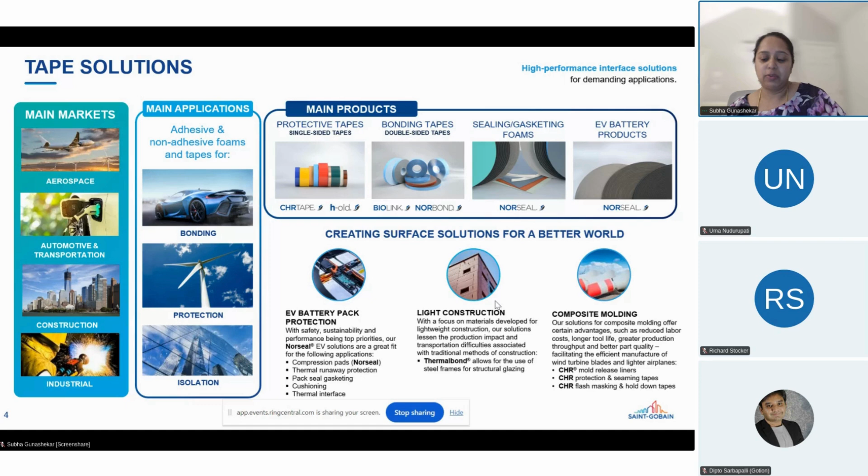With that background, I want to give a little introduction on why compression is important in cells, then talk about thermal propagation, and then introduce our strategy about providing multifunctional materials which combine both mechanical and thermal properties in cell-to-cell and pack design applications.

To begin with, maybe it's preaching to the choir to some extent, but I'd like to start with this background. There's a very nice study which talks about stress evolution and how it is related to the capacity of batteries. If you look at the cells, once they're made and you start using them, there are several types of swelling you will come across. The first is reversible or cyclic breathing, which happens during normal charge and discharge cycles, so the thickness or gap between cells varies, but it's not permanent.

It could be reversible. Then there's another part of swelling where over time, from the beginning to the end of your life, your cells gain some thickness or increase the gap between them. So there are two phenomena normally going on once you start using cells in a pack, and using the right material to manage these two is very critical.

Why? Because many battery cells require some amount of pressure to function, especially new technologies like silicon-based anode, which really require some pressure. Same with solid state batteries. With NMC and LFP, we are just dealing with normal charge and discharge, reversible cyclic breathing.

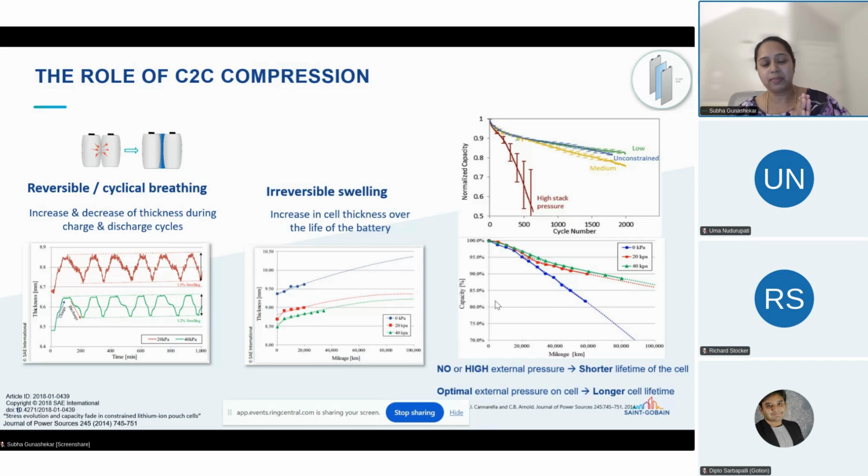So irrespective of the cell type, the crux here is that there is some pressure requirement. If you apply too much pressure over a certain period of cycles, you see the capacity decreasing - this is the top curve. Whereas if you apply the right amount of pressure over prolonged cycles of charge and discharge, the capacity stabilizes or doesn't drop as much. In layman's terms, translating that capacity to mileage or range, it's very important to have the right amount of pressure on your cells.

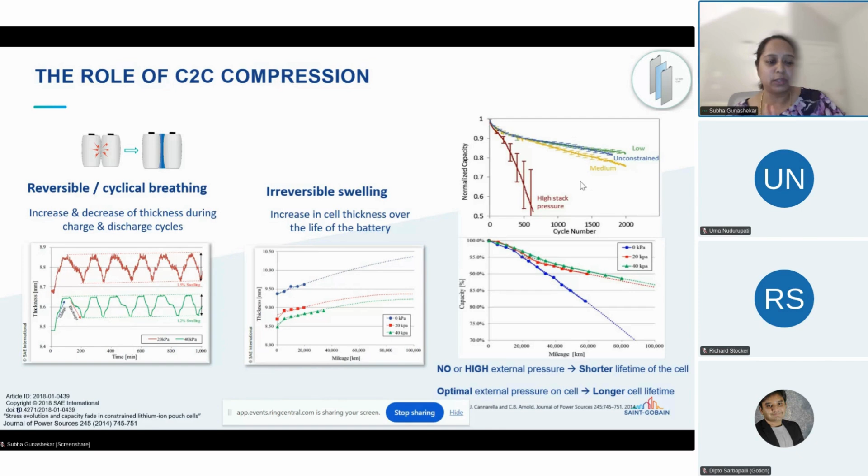So with this background, we want to see what factors affect cell performance - what else can change or impact the range of your vehicle or the capacity of your cells.

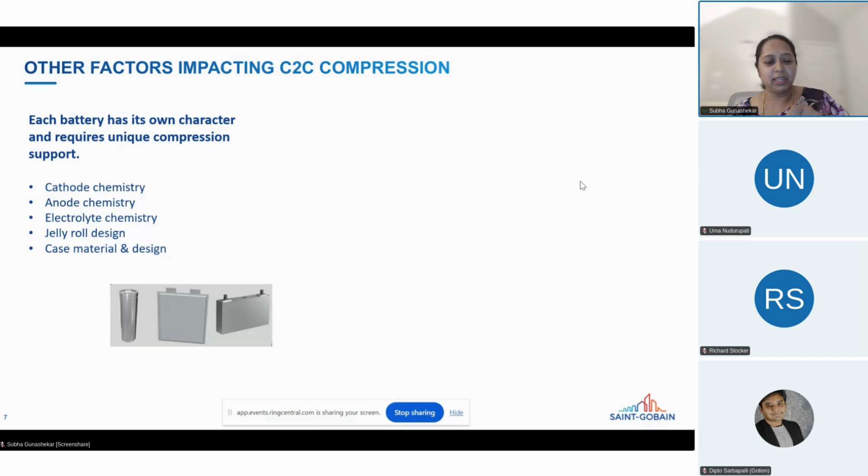So the first one was just the cyclic, reversible or irreversible breathing. The next one is the type of anode or cathode you have, or the electrolyte chemistry, and even the form factor, whether it's a cylindrical cell, pouch, or a prismatic cell. So, depending on each of these factors, your cells will have different pressure requirements.

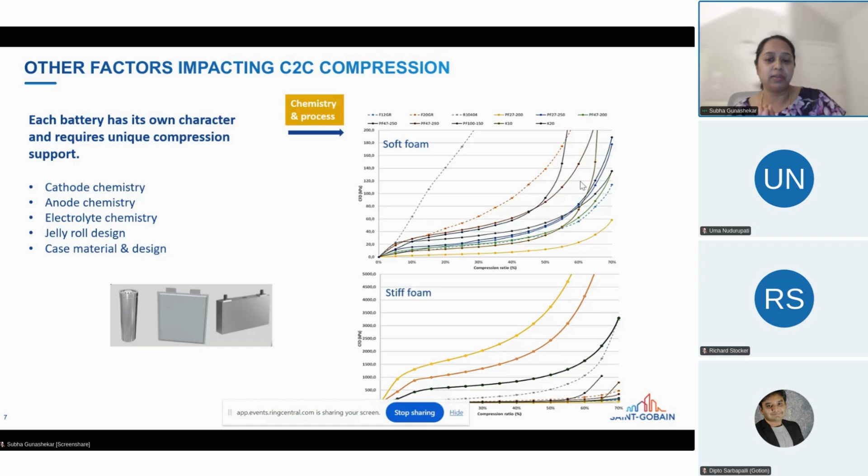Sometimes you need a soft material to help with this breathing process to make sure your cell capacity does not fall. Sometimes you need a very rigid material. So all of this can be managed through polymer foams. As Saint-Gobain, that's one of the key products we are offering in this area. So I'm going to talk more about that.

So from this overview, we said there are two things which are important: making sure that the dimensional changes are accommodated irrespective of the type of cell you have, and then ensuring there is optimal pressure on the cells. So there is no one size fits all solution, unfortunately. This we have learned through design and development with several of our customers. Whether it's a type of cell or a type of chemistry, the pressure requirement is different.

So in the EV space, particularly for the batteries, we haven't been able to offer one standard product off the shelf saying that, yes, this is what would work for this. So though our goal is to get to a stage where we can offer some standard solutions, it involves some kind of customization and development usually. So the earlier on we are engaged in the design phase, it's much more easier to make sure the right product is provided to our customers.

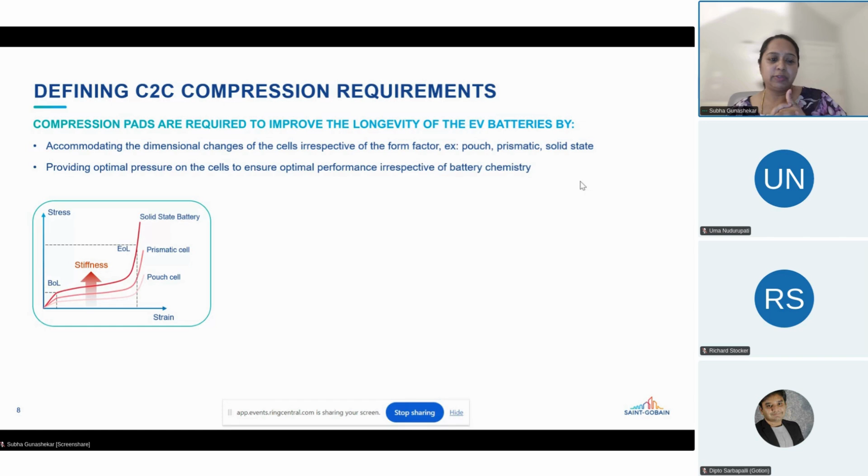So looking at this example here, usually the process starts with defining the kind of requirement. The type of cell or the chemistry kind of dictates those requirements. And what does that translate to us? As a materials provider, we're talking about polymer foams here.

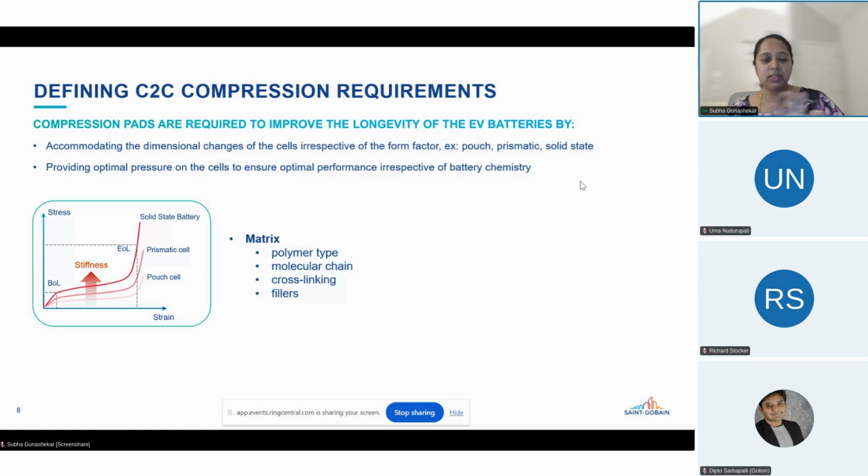So the requirement from our customers translates into the type of polymer we would use, how much cross-linking we need to have, what kind of molecular weight you need to have, do we need to have fillers, or whether we need to provide a softer foam or a rigid foam. So this forms the basic matrix. And then the type of matrix materials used define the microstructure, which kind of translates to the properties we will get eventually. So it's kind of a loop.

It starts off with the application requirements or the technical requirements of the type of cell, and then we design the polymer matrix or the microstructure to provide a certain specific microstructure, which can provide you the properties you're looking for.

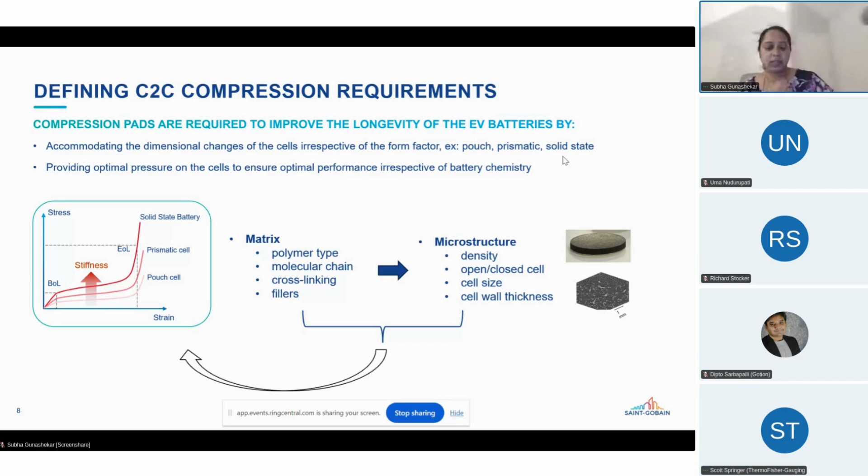This works mostly for the compression requirements, but having the ability to manipulate or formulate these polymers from basic raw materials, we're able to modify it further to add multifunctionality. So that's where the second layer of protection kind of comes in, related to thermal management, where we are not just limiting the performance of our materials to provide a certain amount of pressure, but also some amount of thermal propagation or thermal management.

So specifically over the past couple of years, we have designed a polyurethane-based series of foams with various flame ratings and various densities and thicknesses to address this challenge in the e-mobility, ESS, or EV charging market. So one important factor here is that these foams are engineered to provide mechanical cushioning, and it's very important to have that constant deflection force.

So there are lots of polymers. There are much cheaper polymers, and then there are other polymer foams, for example, silicone foams, which are much more expensive. The question is, why should I choose polyurethane foams? So the key factor is to have a constant deflection force.

So once you have a cell in a pack, from the time it starts charging to the end of its life, let's say it's about 10,000 cycles, whatever material you use as a compression pad between the cells or a group of cells, it should not lose its structural integrity, where it would kind of lower the pressure requirement on the cell or help damage the cell in some cases.

So polyurethane foams are very good in maintaining a constant deflection force. They have very good compression set, meaning over a prolonged period of time, they don't lose their structural integrity. In addition, there's also good dielectric strength, which is very important for safe electrical operation in packs.

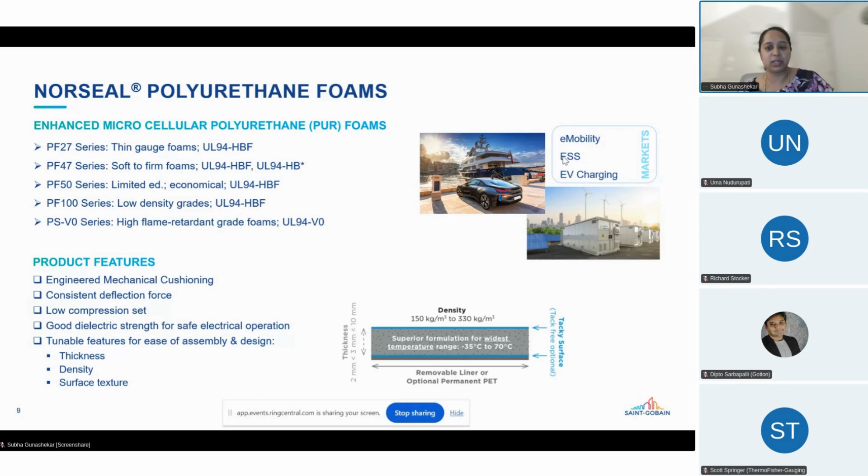Talking about compression pad applications, what is the property we measure and how does that translate to your pressure and force requirements? The common lingo we use to talk about compression pads is compression force deflection. This is not the first time you compress your foam.

If you look at the curve here, you take a piece of foam and compress it. The initial compression is your force to compress, and then if you hold that at the same strain rate for about a minute, there is some stabilization. Your force value falls and then becomes stable. So at the end of a minute, we measure the stress again, and that's called the compressive force deflection.

Here you see a stress strain curve of several of the polyurethane foams I just spoke about. Depending on the density, you can see the compression force response here. A more rigid foam will have a higher force value compared to a much softer foam.

Overall, in battery cell and pack applications, what we want is a flatter curve over a long strain period. For example, between 10 to 60%, or 10 to 70%, you don't want your force values to go up too much. So we've been at work on this for quite some time now.

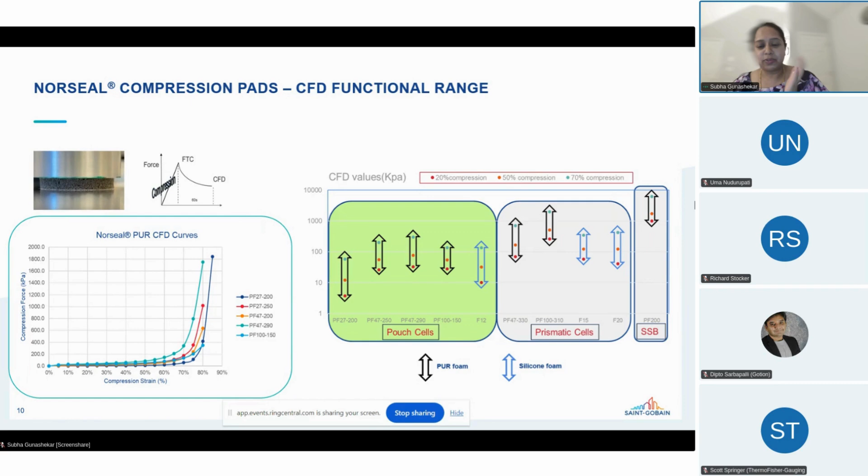But in terms of cost, the advantage is to use a polyurethane based solution because it's much cheaper and provides you a wide stress strain curve.

Talking about the polyurethane foams, I want to share a case study here to relate how this translates to performance. We have this product PF47-250, which is used in some cell-to-cell applications by a few of our customers.

The customer came to us asking for some validation test to confirm, okay, let's take 3,000 cycles, and I want to make sure that this product does not lose its performance, mainly the pressure or the thickness, or the structural integrity, irrespective of the temperature range.

So we did this test at room temperature, 60 degrees, and at minus 20 degrees. We did cyclic fatigue tests and measured the thickness before and after, and also measured the stress strain values.

You see this curve here is just at 60 degrees Celsius between cycle 1 and cycle 3000. There was a little bit of a drop between the first 100 cycles because it's a polymer material, so there is some lag there, but it's very resilient. After the 100 cycles, it did not grow further. The hysteresis is much shorter.

That's what this graph is showing. This is a summary of all three different temperatures. At different temperatures and after 3000 cycles, you can see there's been not much material loss. The foam is still intact, no visual damage. The thickness loss was less than 3%. The stress drop stabilized after the first 100 cycles, so there was no significant pressure or stress loss irrespective of the number of cycles.

This is very important when you're talking about cell-to-cell applications. This was custom made for a particular type of battery chemistry and form factor. The same can be repeated depending on what customers are asking for.

Any questions on this so far?

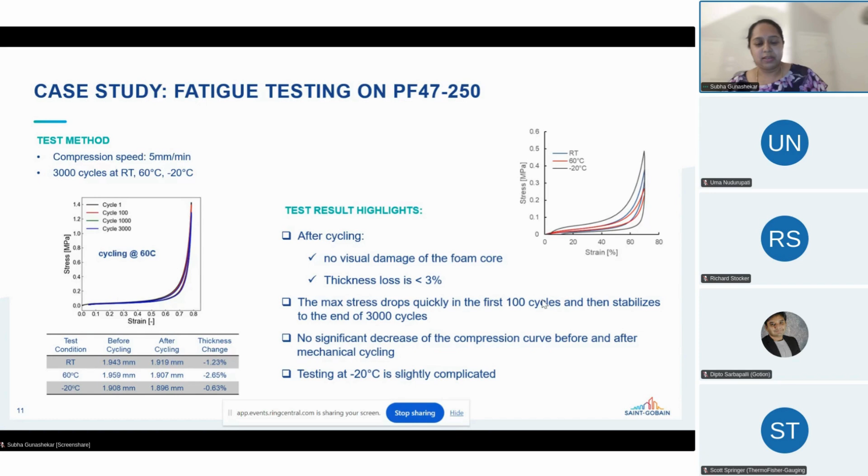I will transition to the thermal aspect now. Similar to compression, thermal propagation is kind of a tricky factor as well, depending on your cell chemistry and the form factor. It's something which is very important to manage. If not, it could be a very costly issue to resolve. So having the right kind of thermal barrier between cells or a group of cells can help mitigate thermal runaway propagation in case of a thermal runaway event.

Here, through modeling, what we're trying to show is without any thermal insulation, once the cell goes into thermal runaway, it spreads to the rest of the cells very, very quickly. In this case, it was about 4 minutes.

Adding one layer of material can help slow that down. But if the right choice of material is not used, it could continue the propagation, but at least your time has increased, from 4 minutes to 13 minutes. Whereas if you have the right kind of material, your thermal propagation can be delayed or stopped. Stopped is kind of a stretch goal depending on the type of cells. It's really challenging.

Cost also plays a role in getting the right kind of thermal prevention material. But there are cases where if you have the right kind of thermal barrier, you can stop or delay the propagation significantly.

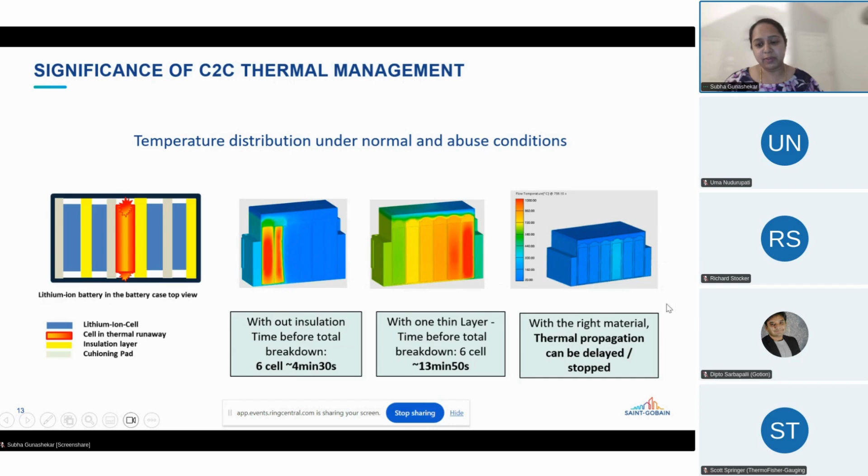This was an example where we were trying to test various battery chemistries and different types of materials. With NMC 622, one of the materials we used failed, whereas when we used an NMC 532, the same material worked pretty good and stopped thermal propagation.

Another thing we found out, but I don't have images to share, is the type of vent and vent design or vent size can influence your thermal propagation significantly. In NMC 532, the vent was much bigger, and it was designed so that most of the projectiles during an event would be going in a certain way, so it had a certain path.

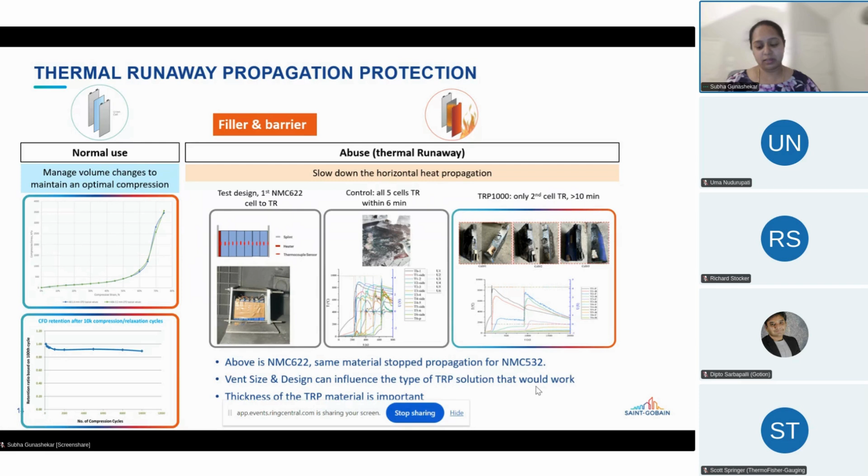Here's a similar map of the thermal runaway materials. There are some which are polymer-based, but silicone-based are the more popular materials here because they have a V0 rating, which provides some initial protection because of the higher flame rating and also higher temperature range. TRP 1000, TRP 5000 series are some of the products we use here.

Again, we're talking about pouch and prismatic cells. There is a mechanical component and there is a thermal component. How do we marry these two properties to provide the optimum solution has been the basic strategy for us in our development activities.

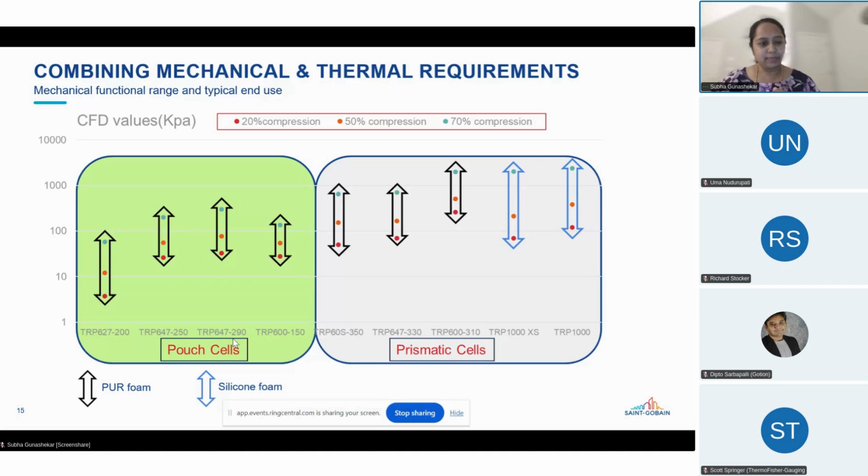I don't know how we're doing on time, but I want to go over some product highlights. This is the most basic product we offer today, which combines the mechanical and thermal properties to some extent to delay the thermal propagation and also provide good mechanical cushioning if used in cell-to-cell applications.

It's called TRP 1000. We have a mica layer and a foam here, a silicone foam. This silicone foam can be replaced by a polyurethane foam if the cells used are LFP cells, where the temperature range itself wouldn't exceed more than 600 degrees. Whereas if it's NMC, your temperature ranges are more than 600, close to 800 or 1000. So we would go with silicone in those cases.

So this is one of the key products we've introduced to manage cell-to-cell thermal and mechanical propagation.

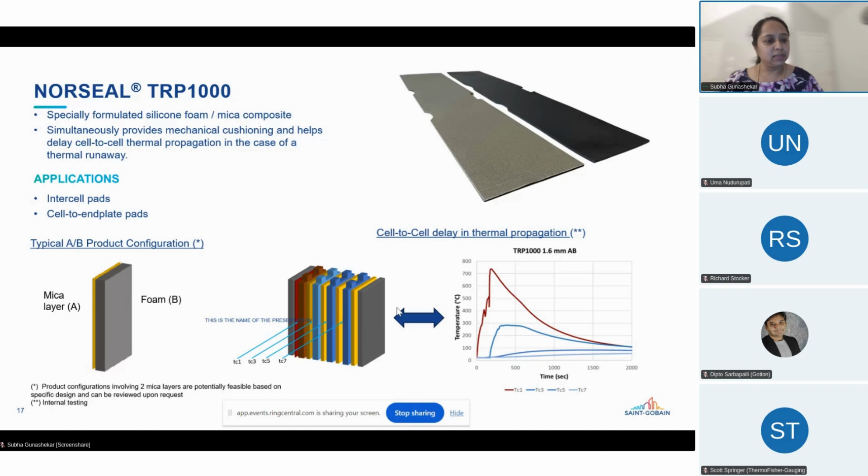The second one is more like a back cover. It's a solid silicone-based material, since many of our customers don't make the cells, so they don't have a cell-to-cell requirement, but they have modules which are put together in a frame. All they're looking at is a pack level or module level cover.

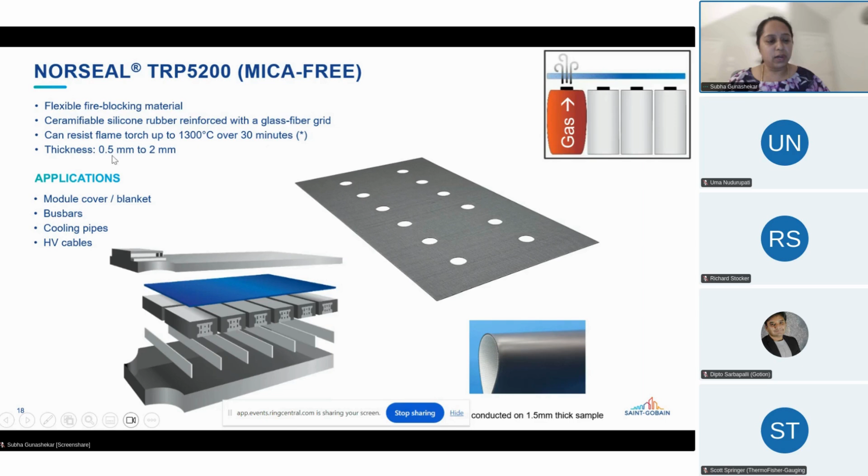So this is a flexible material, it acts as a blanket. Depending on the placing of the vent, we can design some ports for the venting gases to exit, or we could have it completely insulated. This material can withstand temperatures up to 1300 degrees Celsius for over 30 minutes. That 1300 degrees at 30 minutes was, I think, a 1.5 millimeter thickness product, but we do offer this product at very thin gauges, from 0.5 millimeters to 2 millimeters.

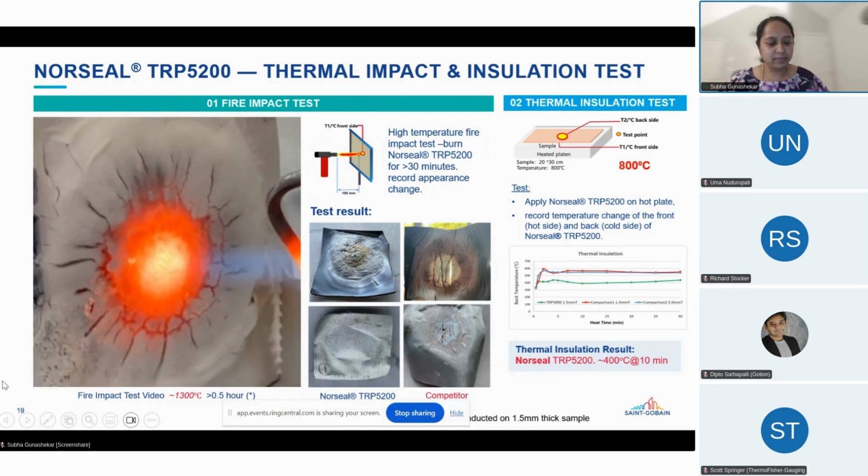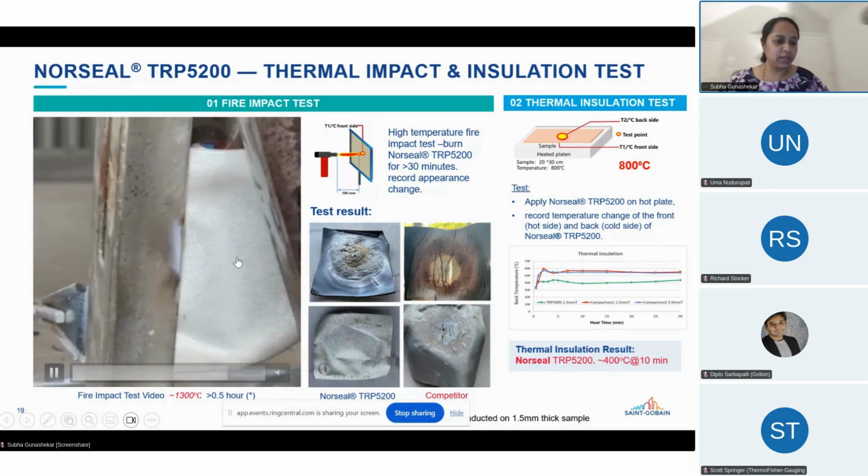So here's an example of the flame testing done on this material: a torch of 1300 degrees Celsius for about half an hour. You can see on the backside there is nothing, no damage to the product and no propagation. It's fairly intact.

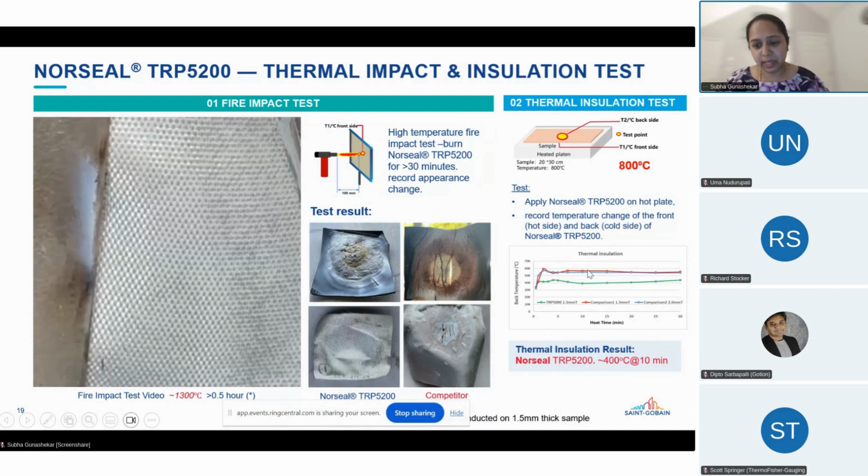Whereas this is a competitor product, you could see it's kind of burned through, had more scratches. In terms of temperature insulation properties, it was much higher compared to this particular product we tested. At 1.5 millimeters, the backside or cold side temperature was about 400 degrees Celsius, whereas an alternate, one of them mica, just a sheet of mica, and the other a similar product from a competitor, the backside temperature was about 500 or close to 600 degrees Celsius.

So these three are kind of the key products we have which can mitigate both the thermal and the mechanical performances.

To summarize the loop or process we follow, we rely a lot on simulation and also do a lot of live cell testing. Many times the customer's inputs and technical requirements define which path we start with. Sometimes we start with simulation, sometimes we just take a material, and depending on the type of requirements, we do some proxy testing or live testing. This feedback loop helps us get to a product which is the most suited for a particular application.

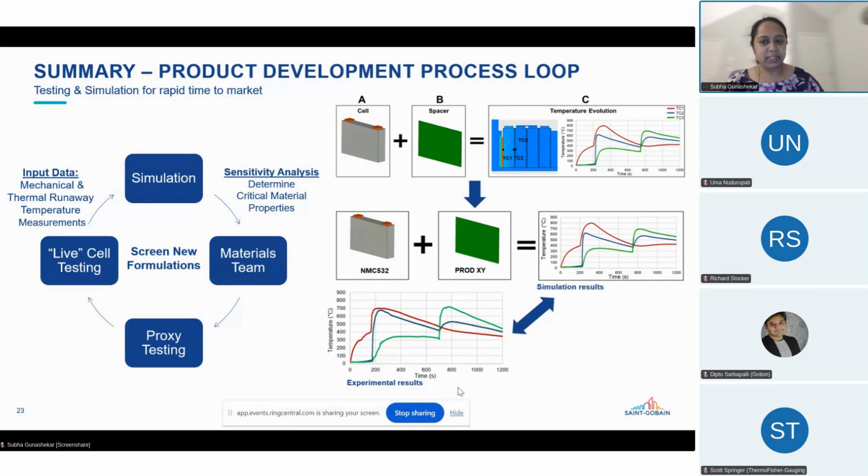So with that, any questions?